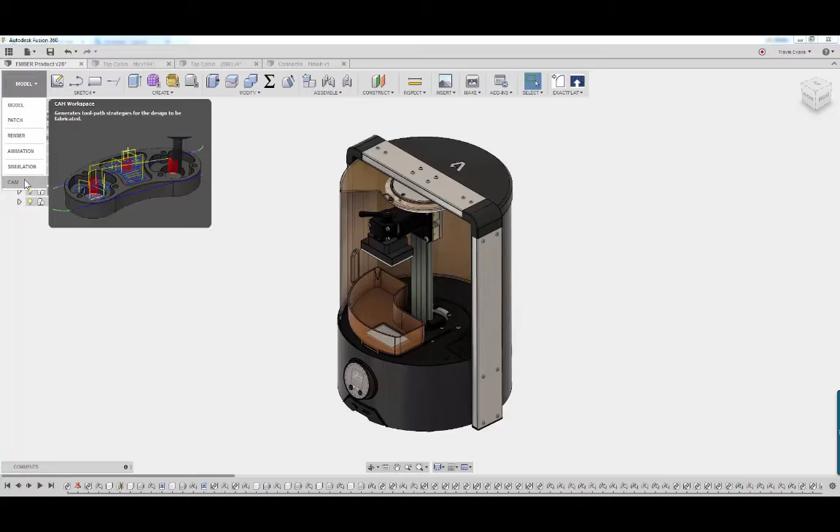So here I'm in modeling, you can kind of see. I can also go into rendering. I've got animations, so if I need to build assembly documentation or exploded views, I can do that. If I need to do finite element analysis, well, we've got an environment for that, and also we've got CAM. The big benefit is it's all integrated. There's CAM products and there's CAD products, but traditionally, how do they talk together? If you make a change, well, then you've got to re-export, re-import, redefine all your things. Not the case with Fusion, because it's all integrated.

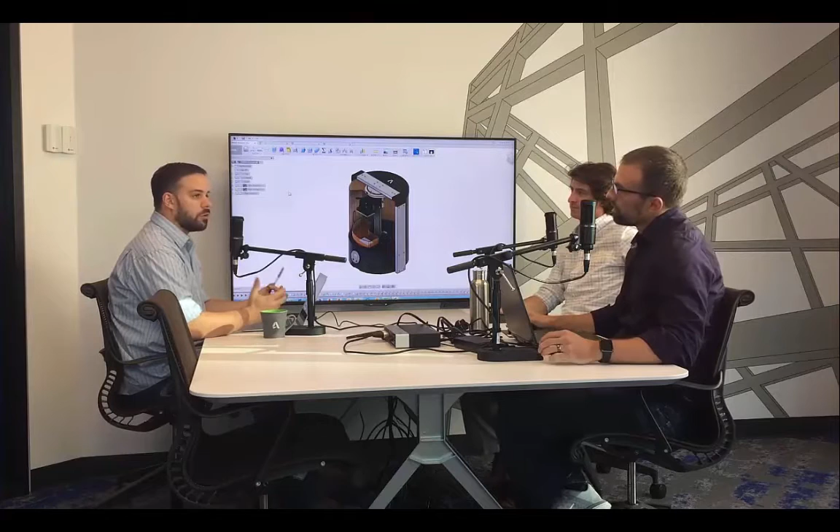Same concept—your detailed drawings, like you're pulling off your structural detailing, right? You've got automated widgets to kind of create those, but you don't want to have to change that every time and redo that. Same idea: your end deliverable is different, right? I've got to deliver a part that's going to be machined, so I need some G-code. I want to be able to get that as fast as I can, and not have to wait till the end of the product to then be able to generate that.

Let's just do it at the same time as we go.

Awesome, great. So a couple quick things I'll show you here, and then we'll get into some of those use cases. What I'm going to show you here is some T-splines modeling.

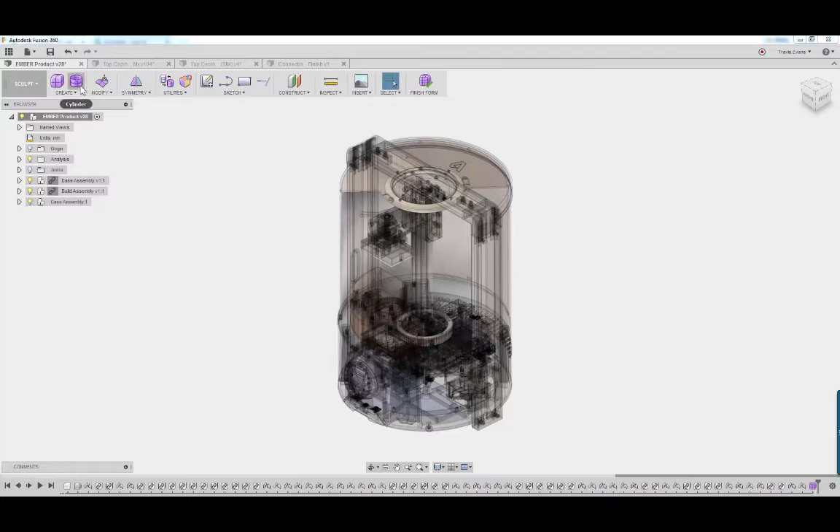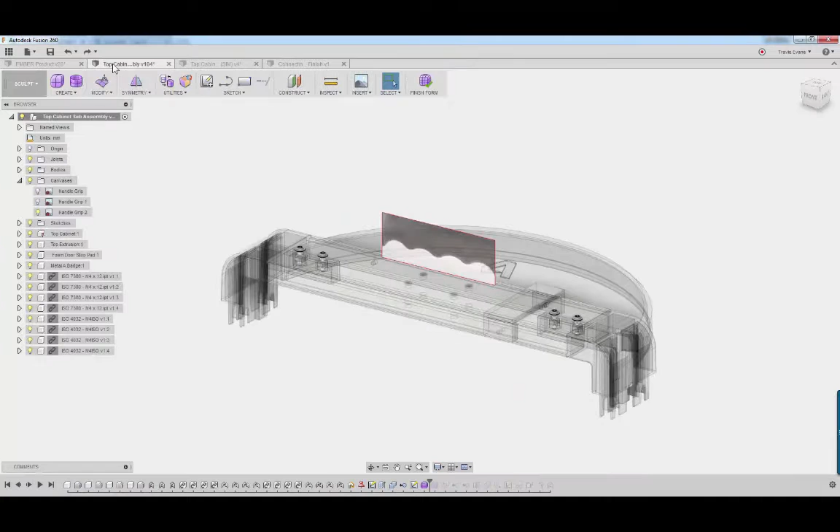It's some really cool stuff. You can see here we get into this different environment, so we can really start to work upon that. But what I want to do is show you where that might seem a little bit different. Here we see the entire product we're working with - this is our Ember printer, one I typically use to highlight a lot of these different functionalities. Here's how it's all set up - I've got my assemblies, my parts, my sub-assemblies. I want to take a look at that top cabinet.

What I want to look at here is creating that T-splines body, which is really how we create surface geometry quickly and iterate fast. We can simply build this out - you can do it traditionally, I could build a circle and extrude it. But what Fusion allows us to do is take that and add some complexity.

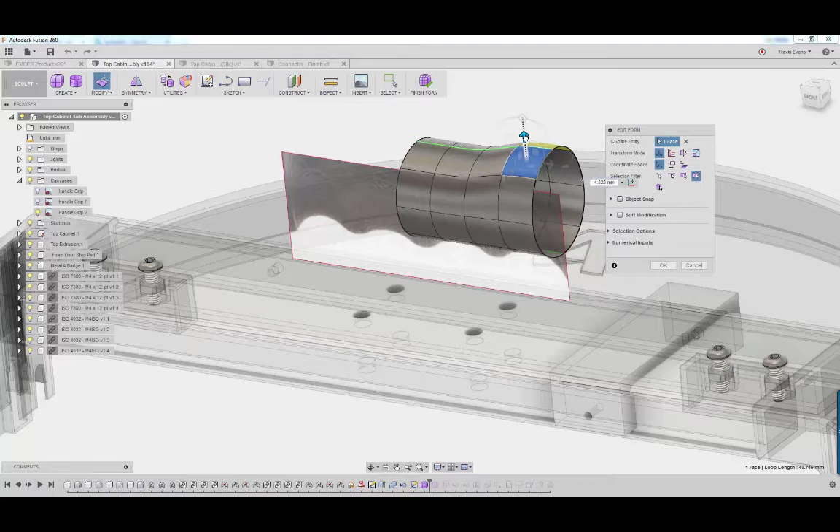If I want to do something like symmetry, I want to take this and drastically change that. Just pushing, pulling, manipulating, I can create some awesome surfaces without having to worry about how you traditionally do that. Traditionally I'd say, here's a sketch and here's another sketch and another sketch - how am I going to combine those together?

Sure, and something else - traditionally, right? So let's grab this guy and add some additional details to it. So if I wanted to maybe add another insertion point here, I'm going to grab this and just add some more detail. I want more control - that's what Fusion can do for you to quickly get those ideas out. In this example, I know it's not quite scaled correctly here, but what if I wanted to add some grips, just pushing and pulling?

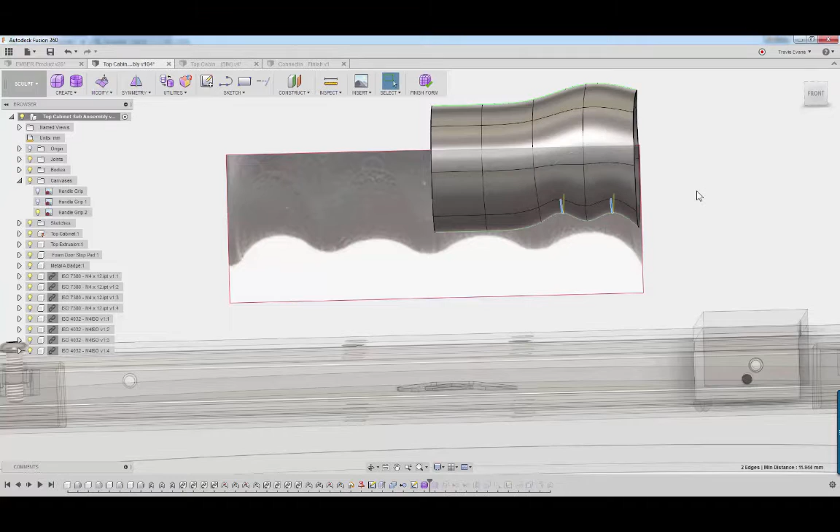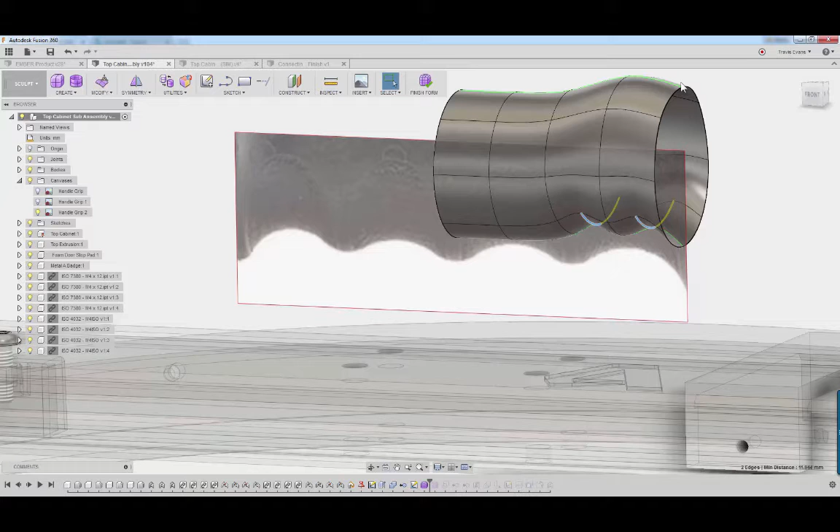T-splines handles it a lot differently. See where this comes together? That's why they call it T-splines, because it's a T-joint. Mind-blowing, right? One of the only technologies that can do that, because traditionally you have to add that level of detail throughout the entire surface you're working with, so you're adding a lot more complexity. If I tweak something, you've got to worry about how things are transitioning, but T-splines helps you out with that.

Great, so I want to take a step back to that because NURB surfaces have been in AutoCAD for many years, but you can't do T-splines. That NURB surface, you'd never be able to get that kind of accuracy and symmetry using just the 3D modeling tools in AutoCAD.

Yeah, there's other tools like Alias. Alias is NURBS-based and super powerful, but you've got to have a specific skill set to use that, whereas something like T-splines inside of Fusion makes it a lot easier.

This seems pretty intuitive too - that's one thing that jumps out at me. Obviously a lot of power packed in there, but it seems pretty intuitive, the tool sets available to you. Yeah, we try to keep everything consistent based upon whatever you're doing, trying to help that intuitiveness to really start adopting it, because it is subscription based. We want to drive adoption because that's how we keep people coming back.

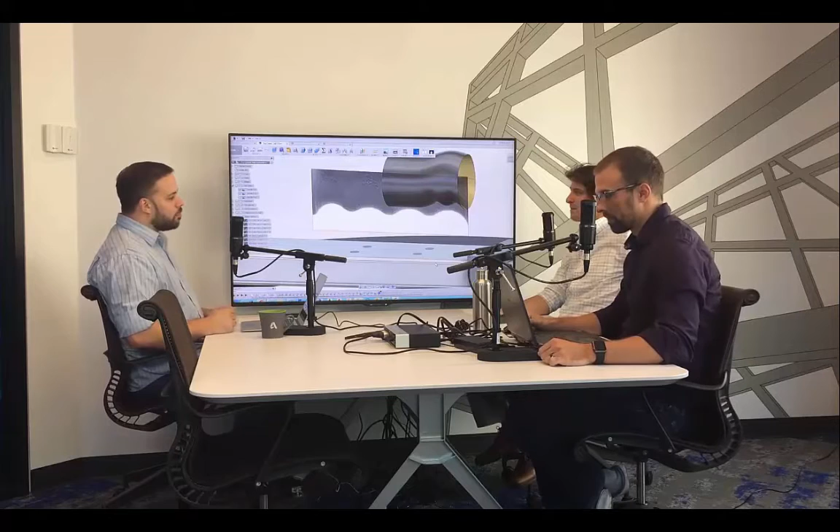So talking about driving adoption, who's using this? A lot of people are using it. We had a lot of different customers, and I think we talked about Inventor a bit at the beginning, but really what it's done for us is open up another environment, another place we can go, like industrial designers.

A big bunch of people we can go out there to get different types of people we can start to work with. I know we just closed some other deals, I don't know if we can necessarily talk about them, but I mean different consumer products, right? People who make cameras and devices, things like that, electronics.

Oh cool, sure. If there's an aesthetic piece to it, that's really what T-Splines can help with. But also because there's the CAM environment in there, I've been talking to a lot of machine shops lately. So talk about disparate systems, right? That whole thing we talked about with, I got my CAD model, got my CAM model. So really helping them solve a lot of those different workspaces as well.

Great, so what are some of the use cases that you can do with this? Yeah, so quickly let me show you in here. We got simulation, right?

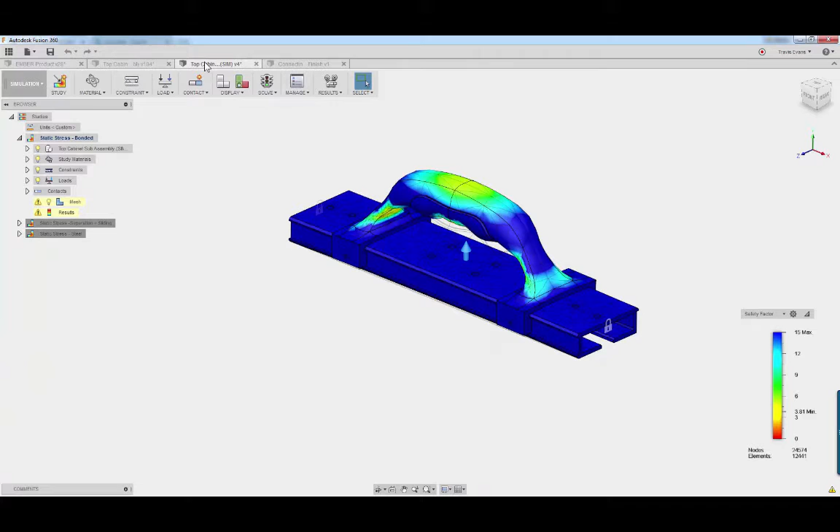So we wanted to show you just kind of some results inside of here. One of the coolest things is how we can look at the results, right? Factor of safety, is this thing going to fail? Well whatever load I supplied, it's 3+, it's going to be able to sustain that. But if I wanted to, I could dive down into those specific areas where I might have problems with stress concentration.

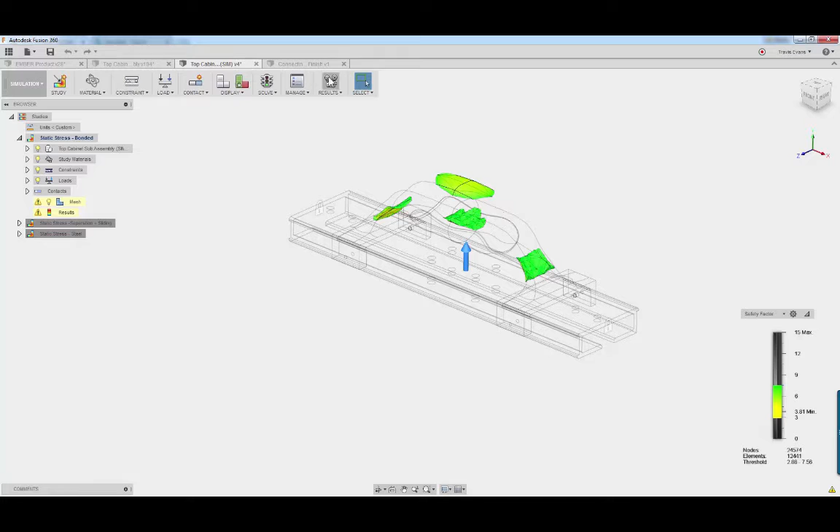Sure. Other things we can look at, right? So we talked about some machining. Well let's go ahead and generate that and give you a preview of what that looks like, right? Being able to actually see what your cutting path is, actually running the G code, and then being able to post this out. That's another great thing that comes with our tools, right? The post library, to be able to actually get the G code you're going to need to run on your Haas machine.

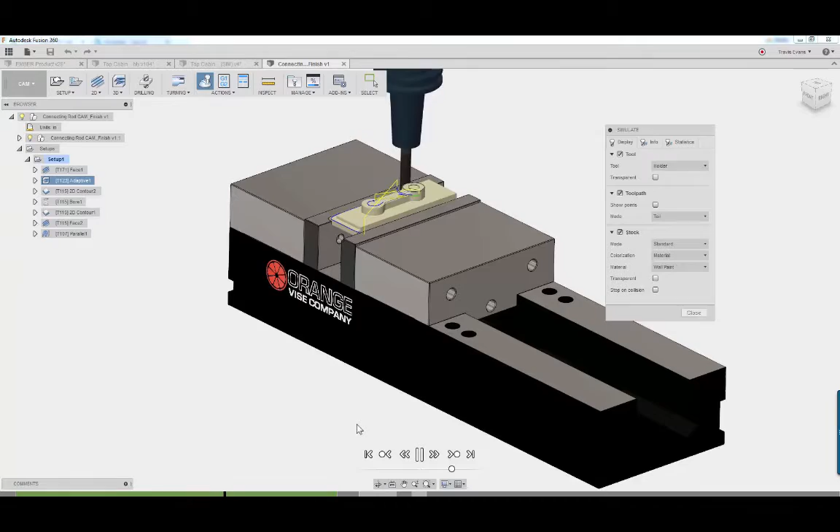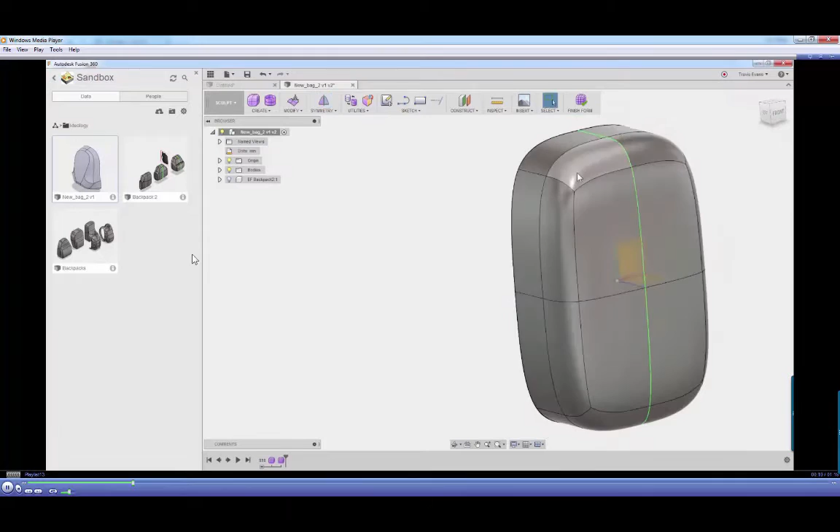That is very, very slick. Awesome, right. So there's some of the different environments we want to talk about. You said use cases, yeah. Let's pull up a couple different things. One opportunity I had is this helps talk about some of the different things because it's a platform. Also being able to take that and expand it out to our partners, right? So giving people writing in code, writing in applications.

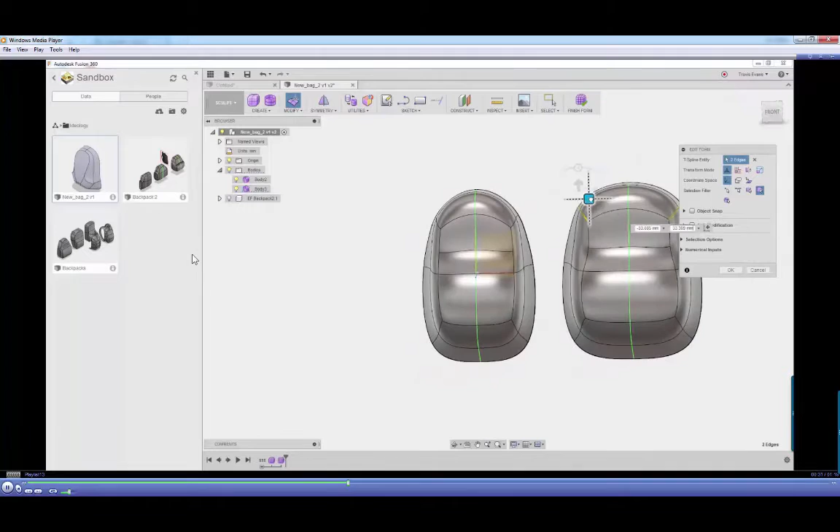In this particular instance, we're talking about apparel, right? Creating a backpack, you can kind of see some of the T-Splines in action. But with a backpack, it's soft goods, right? Yeah, so it's not traditional. I'm going to cut it, I got to have a flat pattern, and that cloth is going to stretch. Well, we have add-ins like ExactFlat that can actually calculate those types of things, right? So as you can see, I get a final idea or concept I want to run with it. Well, now how am I going to actually manufacture that?

So Fusion being a platform, reaching out to our partners, giving them opportunities to write add-ins for that and those types of things. And ExactFlat just happens to be one of them, specifically for apparel.

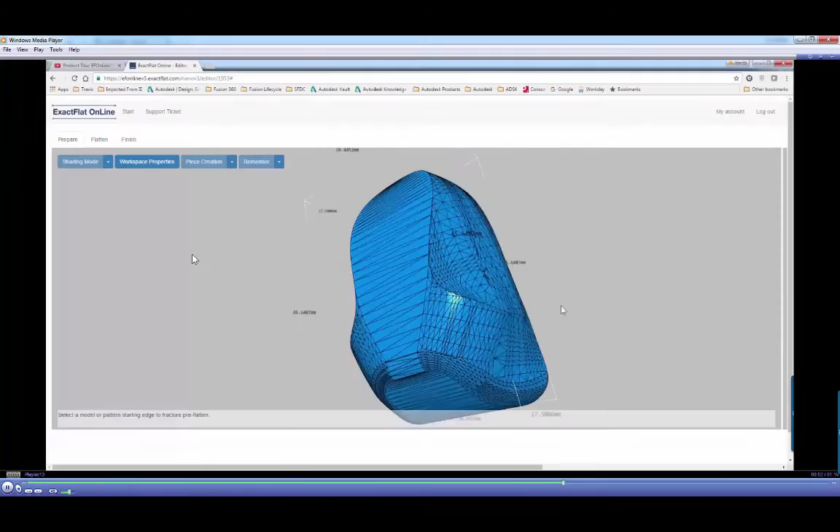That's awesome, that is pretty awesome because I've seen with just stainless steel, you make a plate, and you got a fold in the plate or a curve in the plate, and what is that true length? Well, it's very difficult to hand calculate, and some of our software can show that. But for fabric, I never would think that you'd be able to just use Fusion for a backpack and be able to get what that would look like and prototype it.

Yeah, and another benefit, right? Be able to get there quickly. Because there's other ways you go about it traditionally, but how do I get there quickly? And Fusion helps us do that.

Yeah, I think that's one of the coolest aspects for our end. So different on the AEC side, right? We have those static materials we always are dealing with. This opens up a whole new world of possibilities to input. Brick, mortar, steel, yeah, right. But glass, don't get too crazy. Wood, yeah.

I bought a bus recently, I think this is the greatest thing. I love the Utes, I love tailgating. Who are the Utes? University of Utah college football team, named after an Indian tribe in the Utah Valley. Thanks for the dumbed down explanation.

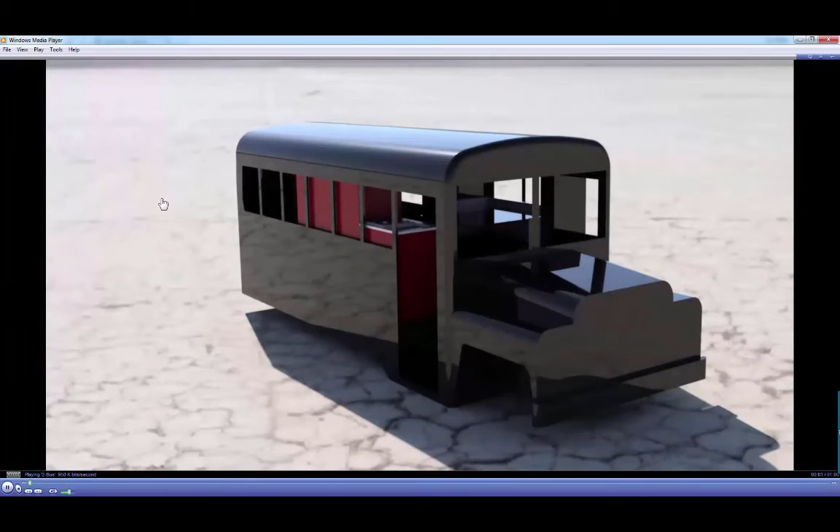It is awesome. So we talked about rendering, right? I wanted to create some renderings, and what better place, I live in Salt Lake City, let's throw it on the Salt Flats. You can bring in those images right inside of there.

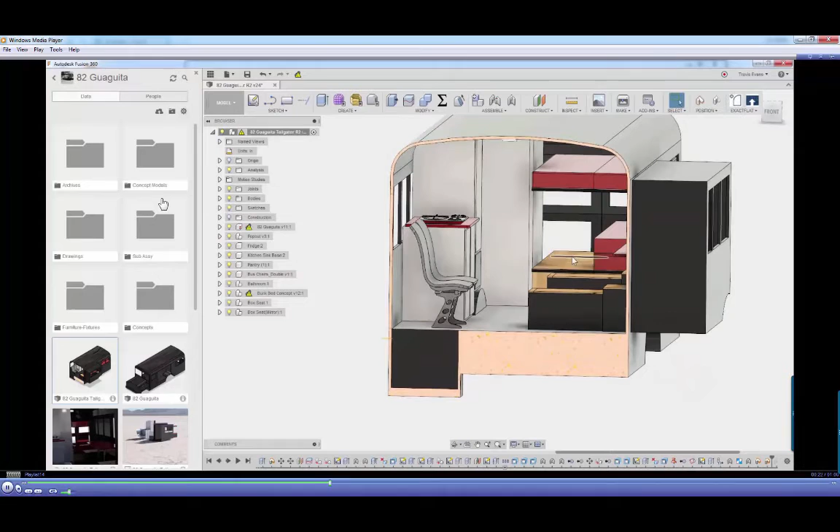But the thing I was trying to do is communicate with my team. In this instance, my team was my wife. I wanted to communicate to her what we have access into here, right? So it's not just going to be a tailgater, but it's also going to be an RV. I want multiple disciplines, but when I'm out there tailgating, I want access out my back door. So I was trying to show her that, and with Fusion I can enable some of those motions. Better than just me showing her on the screen, we can actually create nice, high-quality renderings. We have the full animation, publish it out to a nice little rendering, and then I can really communicate with my team what's going on.

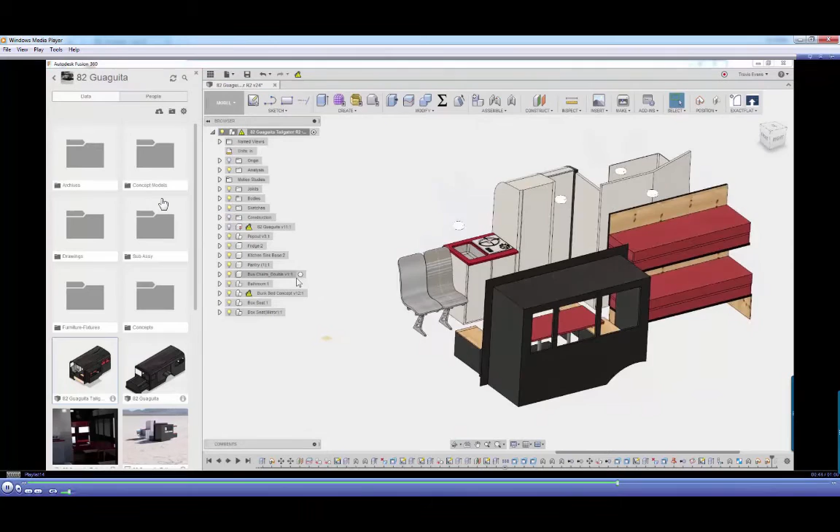So yes, not everybody builds buses, but some of those same aspects apply - how do I communicate those design ideas? That's really what Fusion can help you do to elaborate on that. It's absolutely gorgeous, and it's that same concept a lot of people have been talking about in the industry - how manufacturing, architecture in AEC is becoming more like manufacturing in the way it's so much easier to convey a 3D model to somebody, a 3D rendering, than a 2D set of plans. Not everybody can comprehend and get that 3D visual mindset of a 2D set.

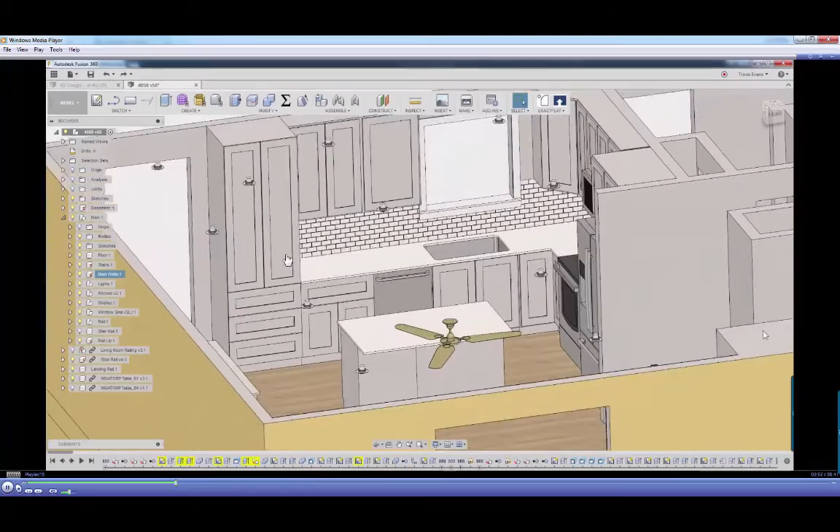Same concept - you talk about architecture, homes, right? We all got homes, we all want to do modifications to our homes. So again, this is just showing you that Fusion, yes, we have a specific use case, yes there are things, but just showing you kind of what we can do, a broader possibility. I wanted to remodel my kitchen, we're removing walls, and I wanted to show my wife and kind of get buy-in, get sign off on it, conveying that information to the team. I can create these nice walkthroughs of my product, not even just from inside of Fusion, but even through a web browser.

Fusion has a mobile app, you can actually do walkthroughs and fly-throughs. One question my wife had - she had watched a lot of these fixer-upper shows, and she loved this idea of shiplap. So here's an actual picture of what it turned out like. I'm just showing her, here's the digital model, here's the after model, and communicating that information. Is that a rendering? No, that last one was actually the actual finished product.

Build my kitchen. So that's it, thanks.

That's beautiful, awesome. But again, communicating to the team, how are you going to do it? Are you going to do it via a live sharing session? We can do that, or create some great renderings, or even just design reviews and markups. We do all that right inside of Fusion.

That's pretty awesome for cross collaboration. Your designers might not be in the shop a lot of the time. They could be in another office, another facility, another state. Some of the best ideas you probably get are when you're at home, right? I would think so.

So here's one thing. I actually used to support AutoCAD Mechanical, a 2D program, really awesome. You can create all your third angle projections, which is your top, side, front, and then the ISO view. A lot of companies still have those sitting around, and they're still building off of those third angle projection plans. How do they get into this environment?

Great point. I actually have another video I can bring up as we talk about it. So going from 2D to 3D, there's still a ton of customers that just have AutoCAD, they haven't moved to 3D. They maybe want to get there but want to make it easier. But that's a lot of legacy data, and you don't want to lose it. So we can actually reference that inside of Fusion.

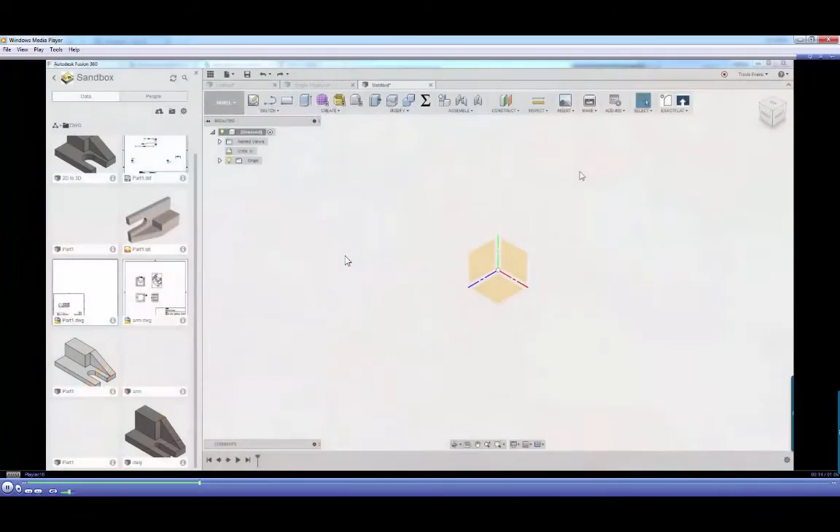And what's super cool is, like you said, those third angle projections, the top, the side, the front, we can use all of those and create what I call a pseudo-isometric view. Then we can use kind of just regular techniques inside of Fusion, creating 3D models from those views. And then at the end of the day, what happens if it changes?

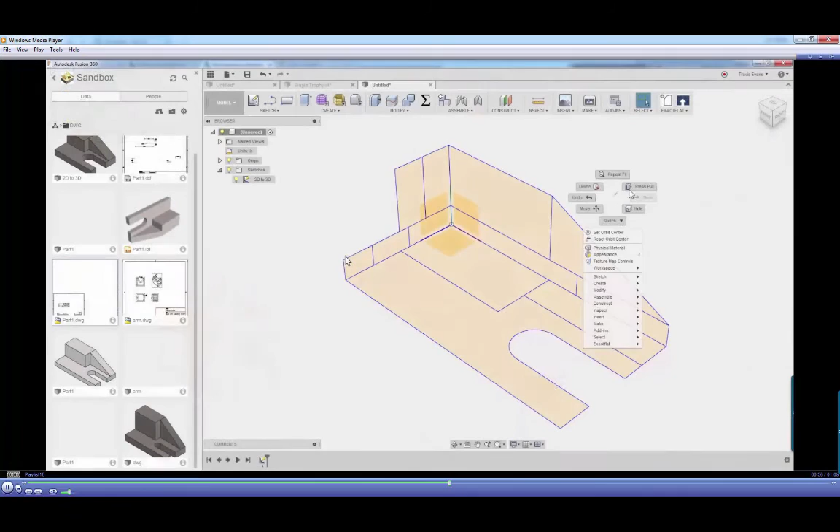Well, we can build parametrics into it. So then once we build parametrics into it, we can create a new drawing, and anytime we make those changes, everything's going to update. At the end of the day, we still end up at the same results because those 2D drawings are what's needed for manufacturing.

But now we have the 3D model representation, because what if we have to cut this out on a CNC machine? Good luck doing that off of 2D drawings. Oh, absolutely, because you're not going to get the G-code out of that. Exactly. So nice to not have to throw it all away, right?

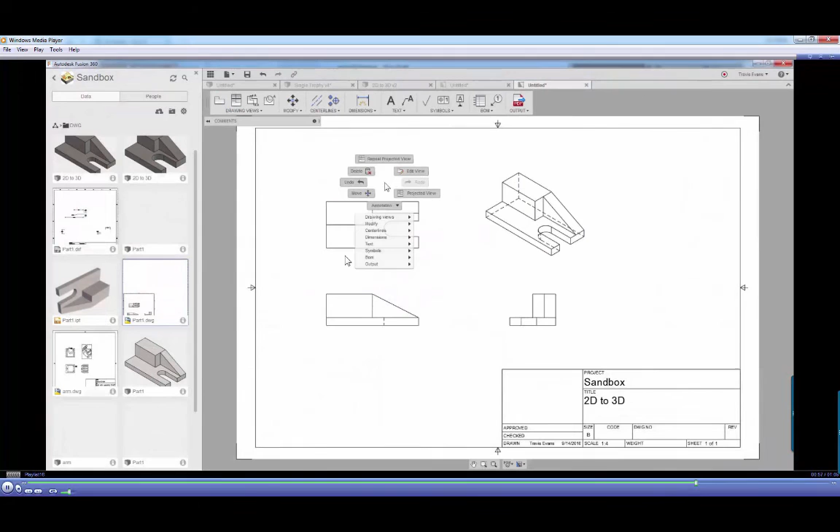Yeah, reinvent the wheel. I think that data's important. And when we talk about driving adoption, that's how you drive it. You don't ignore the legacy.

It's a big hurdle, right? We've heard that plenty of times. AutoCAD to Revit, I'm sure it's the same thing here. You have a built-up library, you have a lot of legacy data. You don't want to just throw it all out the door. Yeah, that's awesome, wouldn't make sense. Sometimes I really enjoy when things make sense.